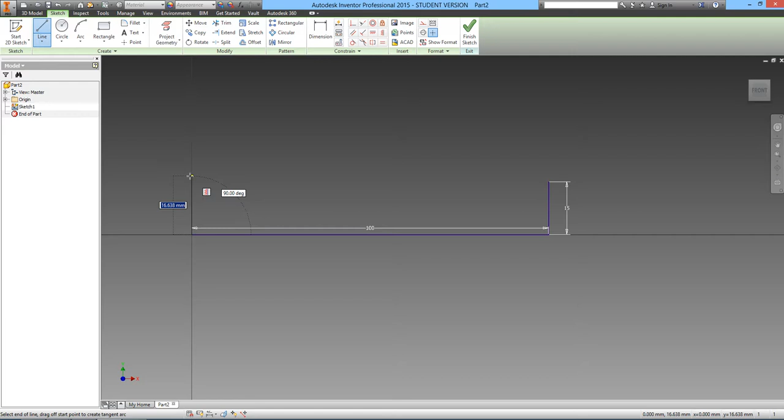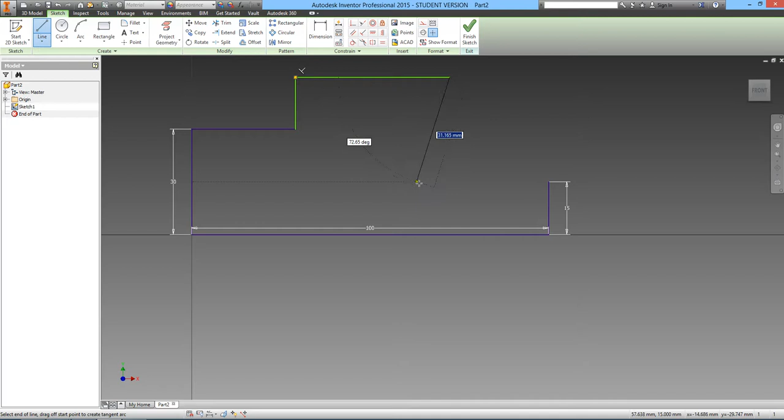And this is going to just come in, go back up, come across here, and then it's going to go down to where it lines up with that edge right there. And it's not wanting to give me that edge, probably because I lined it up midpoint, so that midpoint is also going to work for this. So we'll line that up and then just close that object off.

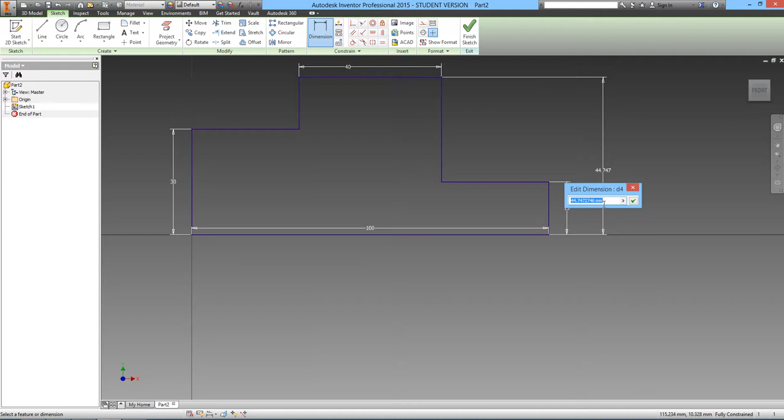Now I can continue my dimensioning for this piece. I know that the top right here is 40. I know that this line right here and this line right here are equal, and that the overall height for this shape is 50. So once I have that, I can go ahead and finish my sketch, and now I'm going to extrude 50. Once I have this, I can begin to place the holes that I have in this thing.

So first I'm going to go to the hole command, and I'm going to select this face, and since I know it's centered this way, I'm going to click on this midpoint for my dimension. It'll just make it a little bit easier, and I know that the dimension is 13 off of this midpoint, so I'll click right here, type 13, and as soon as I click this edge, it already has the 25 in because I did use that midpoint. It does go through all and has a diameter of 20.

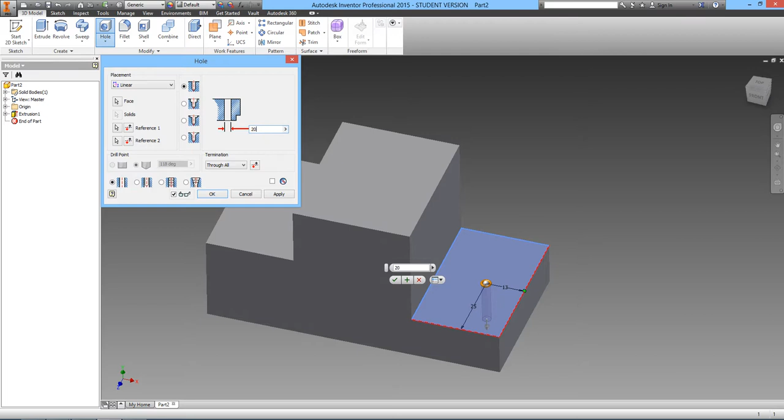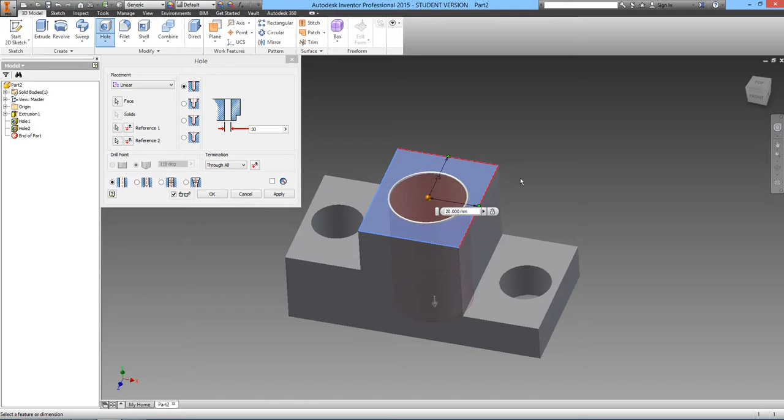I can apply the hole on that side, click this face, and again I'm going to click on this midpoint, make it 13, click this edge, apply that. This top hole has a diameter of 30, and it's in the midpoint of the whole face, so if I come in here and click that midpoint and that midpoint, it automatically sets it up at 25 and 20, so I don't have to do anything else to it. I'll apply that and then cancel out, so now I've got all my holes.

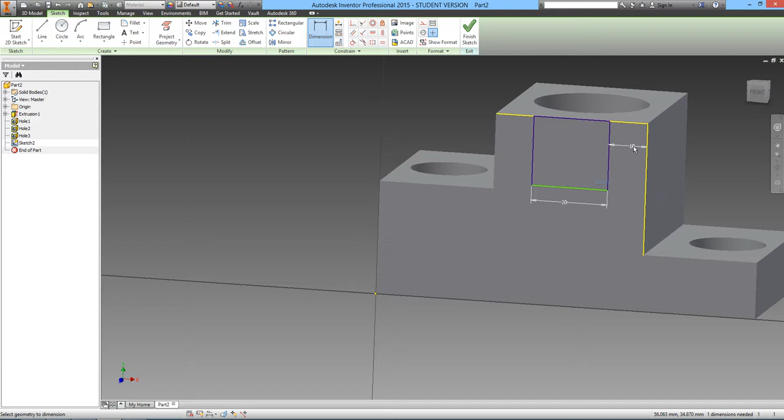Next I can left click on this face and then click on the Create Sketch icon. I'm going to orbit this slightly so that I can see what's going on with it, and I'm going to draw a rectangle on this top line. Now I know that it's equally distant, it's 20 centered, so if I come in here and do a distance right here of 20, then I know that from here to here it needs to be 10, and it is going to be 15 deep.

I can finish my sketch, and now I'm going to extrude this, and instead of a distance I'm going to say To, and I'm going to select the interior cylinder, go back and pick my profile, and say that I want to cut, and okay, something didn't go quite right in there, so let me go ahead and cancel that, and I'll do the extrude again. Select my profile, instead of a distance I want To, this, cutting, okay.

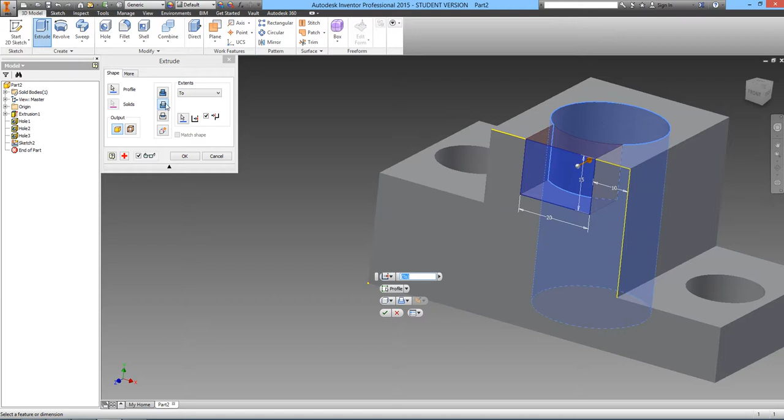So in this case it was an example where I just clicked things out of sequence, so it didn't work quite right the first time. But here we have the completed figure P3-10.